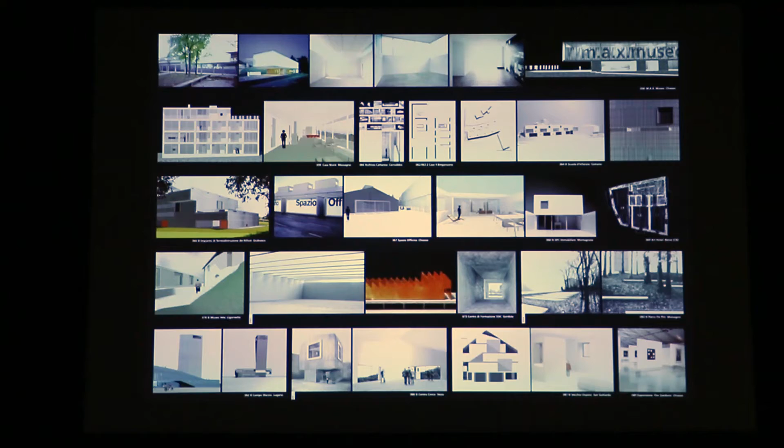For the last two decades, our studio has been involved in several project typologies, from the private house to public and institutional buildings to urban planning, becoming successfully engaged with all dimensions of architectural and urban design.

Facing a project, we recognize two kinds of thinking that interact between them, making images coming forth. The first is given by the effort to see everything as new, absorbing with our imagination all the impulses that derive from the place and the pre-existing context, without prejudice, as if we were facing a certain problem for the first time, with the typical enthusiasm of children.

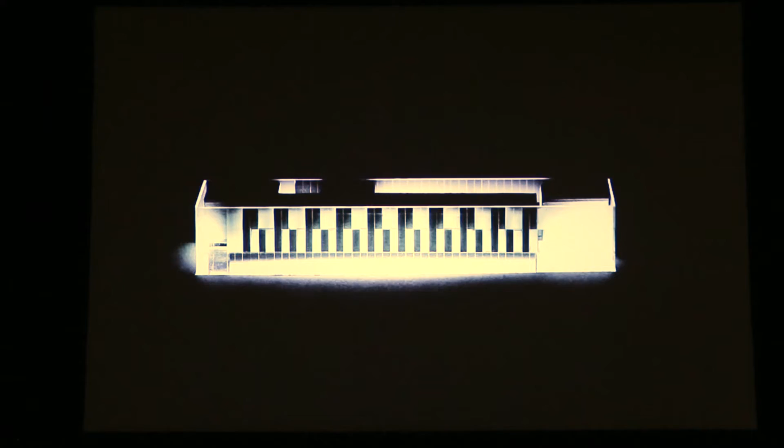The second approach is given by our practice, our professional competence, and the previously acquired experiences, and by the materials accumulated in our memory: experience, evolution, tradition, reference.

We always strive for sustainability in our projects. Between 1989 and 1993, we designed with Giancarlo Durisch the Swisscom Service Center in Giubiasco. At that time, the Swiss label for sustainability building, Minergie, didn't exist yet, but we realized the first high-energy efficiency building of southern Switzerland, with six main projects in the field of ecology and economy.

While renovating the Teatro Sociale of Bellinzona, we came across the big theme of historical heritage. We got convinced that the best way to preserve the past is to make those buildings reusable in the contemporary age. As a consequence, this sustainable approach to the past has to face the reality of the contemporary.

With the restoration of the Benedictine monastery of Claro from 1996 to 2007, we achieved an important and intense experience with the forms, the construction technologies, and the materials of our tradition. We learned from our Benedictine clients the importance of always establishing precise and common rules.

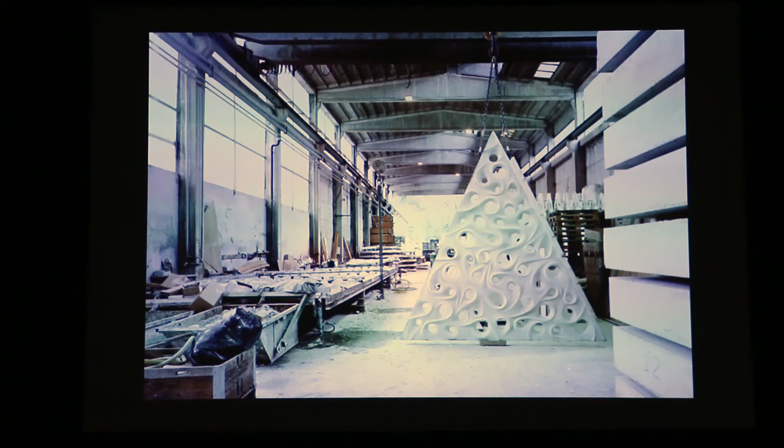Architecture is a system that is strictly related to the site. In this system, the different aspects of the project constitute a complex organism. At the origin of every project, we find the recognition of the uniqueness of the site and of the essential characteristics and properties that determine it.

With the topic of site, we can understand, depending upon the situation, a landscape, a city, an urban space, a building, a room, an object, a surface - the context of our intervention.

To build means intervening on an existing balance and modifying it in an irreversible way. The challenge is to recognize the essence of a place with the purpose to create a new balance, condensing an idea, concentrating it and reducing it to an essence, in a way to create a new reality that gives us the sensation to rest in itself, provided with its own naturalness, a natural evidence that is able to reconnect itself

to the collective memory. In German we could use the term Selbstverständlichkeit. Maybe we can say self-comprehensiveness.

In our more recent realizations, we were able to make a synthesis of the experiences we earned from former projects. The Vocational Training Center of the Swiss Master Builders Association in Gordola represents the ability to carry out a complicated task with a simple and essential system, a light building.

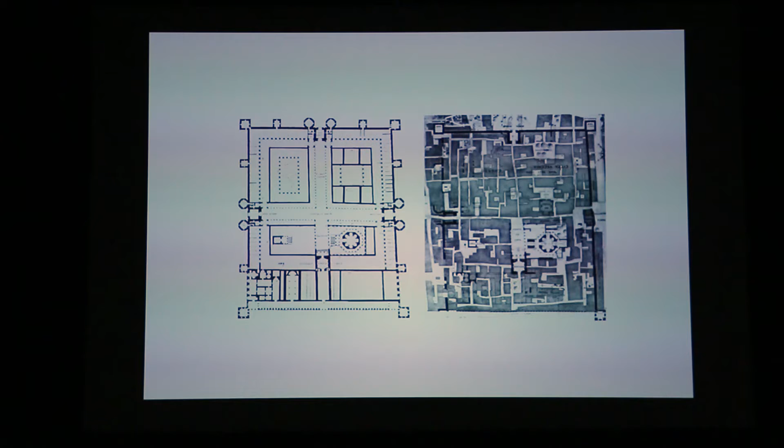The confrontation with the idea of reuse that was the main project theme last year with our students at the Mendrisio Architecture Academy made us consider that everything is reuse and to research on the paradigm of palimpsest. The city of Split is the re-inhabitation of the Roman Emperor Diocletian's palace, an imperial palace that fell into disuse after a time and then became the structure for the new city.

In his wonderful book Invisible Cities, Italo Calvino makes Marco Polo declare to Kublai Khan: 'Every time I describe a city, I'm saying something about Venice.' The Venice Lagoon, an ecosystem that embraces and includes the city, is for Venice what for other cities is the countryside. The reuse and the rebirth of the abandoned islands of the Venice Lagoon as an urban constellation integrated to its natural context would constitute a new perspective for the future of the city.

Our students were invited to work on small territorial fragments which are characteristic to the Venetian lagoon: islands, octagons, fortifications, lighthouses and shelters for fishermen, all charged with past histories and function.

Each student adopted an abandoned island, analyzing its history and pre-existences in order to describe, like Calvino in Invisible Cities, a new program and a coherent project for its reuse, developing a sensibility that celebrates the fleeting and dynamic relationship between physical structures and program.

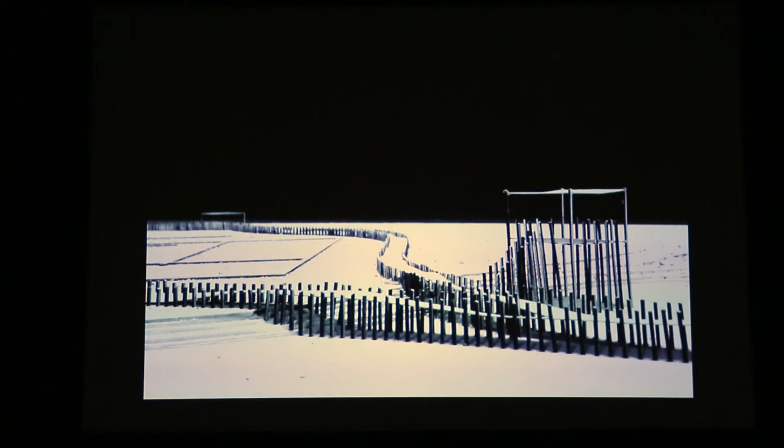A center for navigation control of the cruise ships at Sant'Angelo delle Polveri, a new public transportation station linked to a new entertainment hall at Madonna del Monte, an observatory of the wildlife of the Northern Lagoon and of the Roman archaeological excavation site at Motta di San Lorenzo, or a public thermal bath of the Renaissance at the Renaissance Fort of Sant'Andrea.

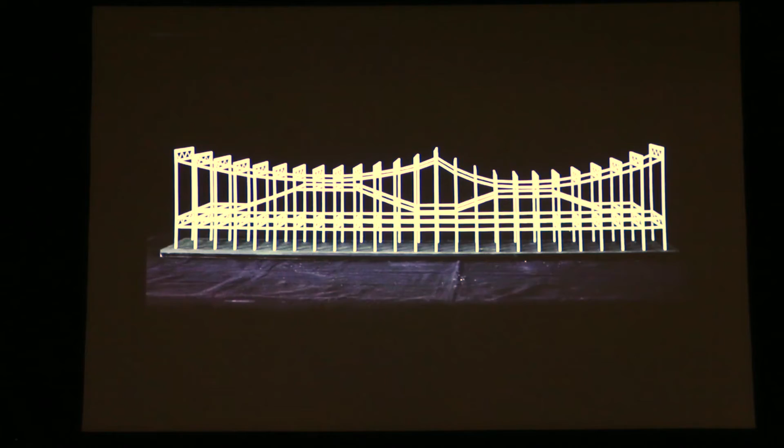A philharmonic hall over the island of San Giuliano, entering the bridge Ponte della Libertà which connects the mainland to Venice. The Venice Museum and Center for Archaeological Studies, already scheduled but never achieved, on Lazzaretto Vecchio Island.

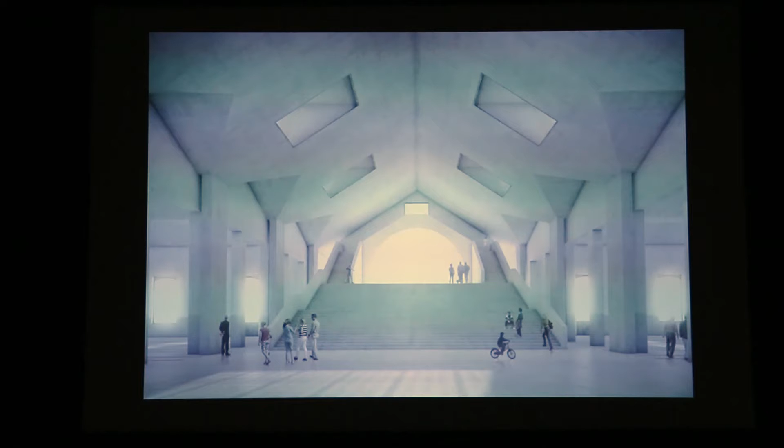Actually, these examples put in evidence that the city, but also our memory, is nothing else than a palimpsest, a document that is continuously overwritten. The contents that are no longer necessary are cancelled and substituted with new contents that correspond to the contemporary physical and social requests. The idea of reuse is not only a physical operation, it can also be a way of thinking that can inform the design of new buildings.

In our competition entry for the transformation of the Lausanne locomotive workshops, part of the heritage of Swiss Railways, into a new museum for modern art of the city, the former space of the factory building is maintained as a public empty space below the museum.

A big covered public space, a passage below the museum within the walls of the previous locomotive workshop, could have linked the esplanade of the new cultural center of the city of Lausanne with the train station and with the city. Also, the industrial architecture would have been visible mostly as a fragment composed by the old facade and the soil.

The spatial morphology, the hierarchy of the sheds and halls of the workshops would have been still embodied in the core of the modern cultural center. The concept of palimpsest, of superposition of overwriting of the pre-existing, is an important rule.

This is an important rule for developing and transformation of our cities, our environment, but also of our civilization, our culture, and even of ourselves. A military riding hall and horse stables can be overwritten as a city theater.

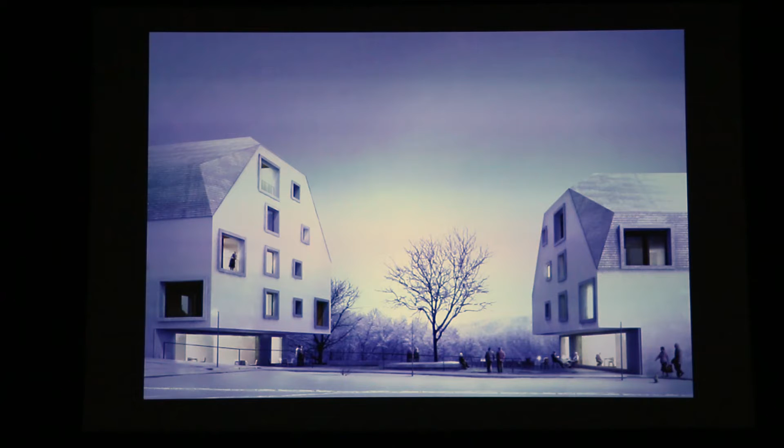Or in the suburbs of Fribourg, where our winning housing project for persons with reduced mobility becomes a place for socialization for the entire population of this heterogenic suburb, with a lack of places of social reference and identification. And at the same time, giving a better life quality to persons with a physical handicap, promoting an active interaction with the social context of a small suburban community.

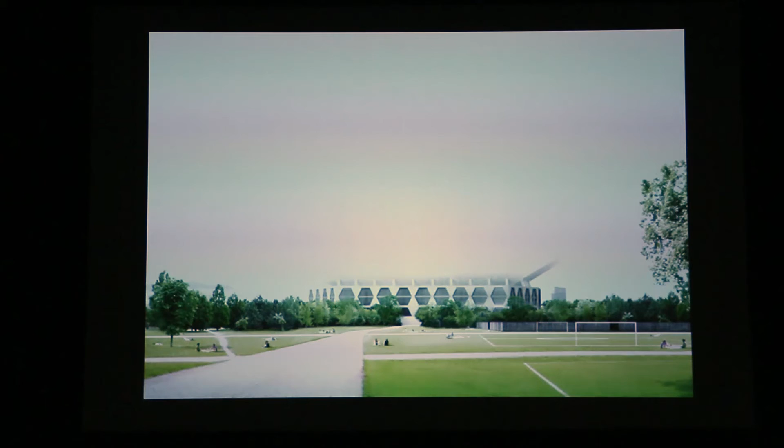We strongly believe in the social role of the architecture of the city. This is the case also for huge peripheral suburb areas of big cities like Zurich, this competition entry for the new Zurich Ice Arena.

Aldo Rossi defines the city as an architecture, a concept that is crucial to face in an effective way urban space and its transformation. For Aldo Rossi, making architecture is always about dealing with the architecture of the city. I quote Aldo Rossi: the city is to be understood as an architecture. By architecture I mean not only the visible image of the city and the sum of its different architectures, but architecture as a construction, the construction of the city over time.

I use the term architecture in a positive and pragmatic sense, as a creation inseparable from civilized life and the society in which it is manifested. By nature, it is collective.

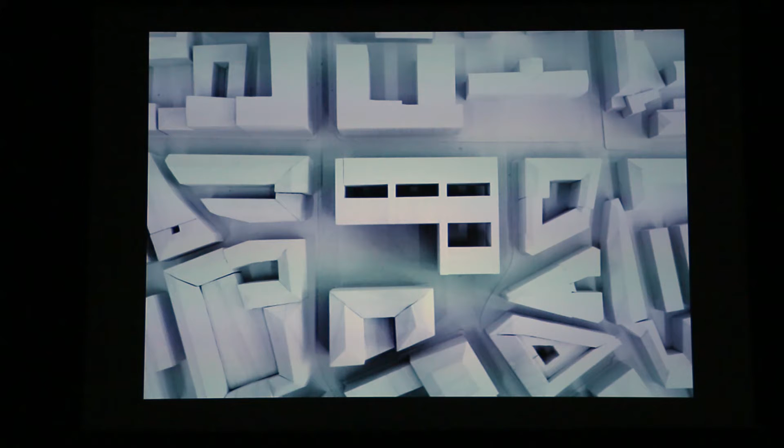And it is just this architecture of the city that became also a workshop theme for our second year bachelor students at the Swiss Federal Institute of Technology in Lausanne. We let the students work on the city of Lugano, it's our city, defining full and empty spaces, structure and space of the architecture of the city.

Creating flexible and sustainable modular structures for the urban scale, structures to be placed as constitutive modules of the architecture of the city, defining urban spaces. Creating new ideal images for 5 real critical city areas. This type of work gave birth to new architecture identities.

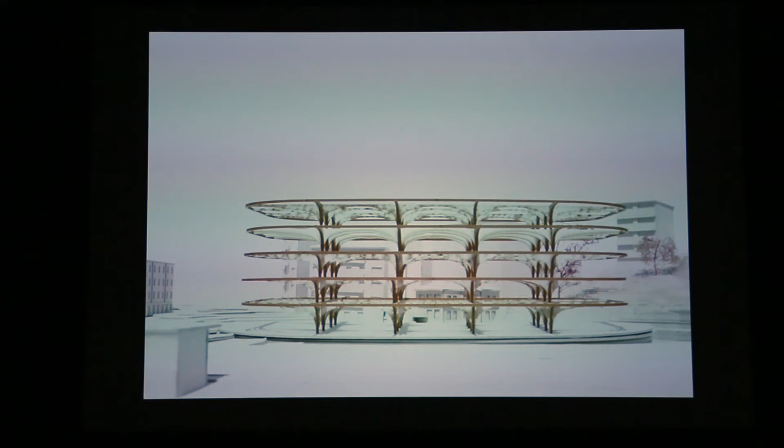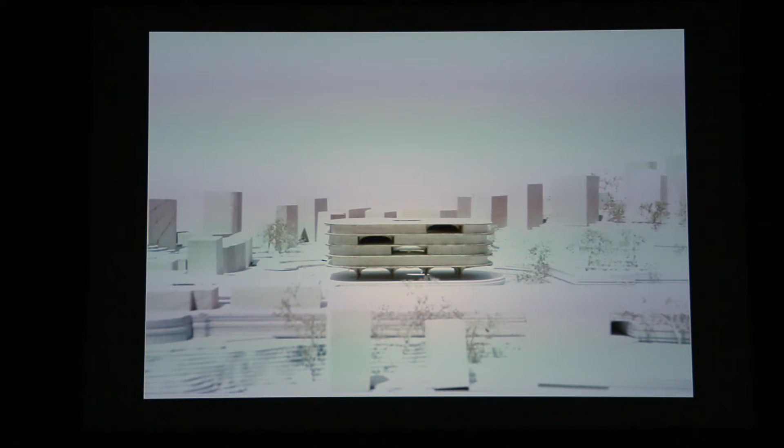Hybrid buildings able to contain any type of public facilities thanks to their structural, typological and urban quality. For example, instead of a 40 million bus platform to be realized in Lugano, with our students we propose, for the same costs, a multifunctional architecture with bus station, retail, university and co-working spaces, a hybrid building able to redesign the entire area, a landmark for the city.

The first project we want to show you is our first housing project. The House for a Sculptor was a very particular project of architectural preservation built between 1998 and 2000. The house is located in the historic center, the medieval core of Mendrisio. The building was conceived as a sort of connection building between the old courthouse and an ancient monastery.

Due to several alterations and modifications during centuries, the typology of the building before our intervention was very unusual, difficult to be defined. The original historic structure was destroyed over the centuries as a consequence of the inheritance laws in Ticino, while the house was divided into different parts.

The house, as we found it, was characterized by an overlay of two different structural systems. The outer stone walls formed a solid and precise case, characterized by the overlap of different openings of different ages, while the internal original structure was destroyed in the 19th century.

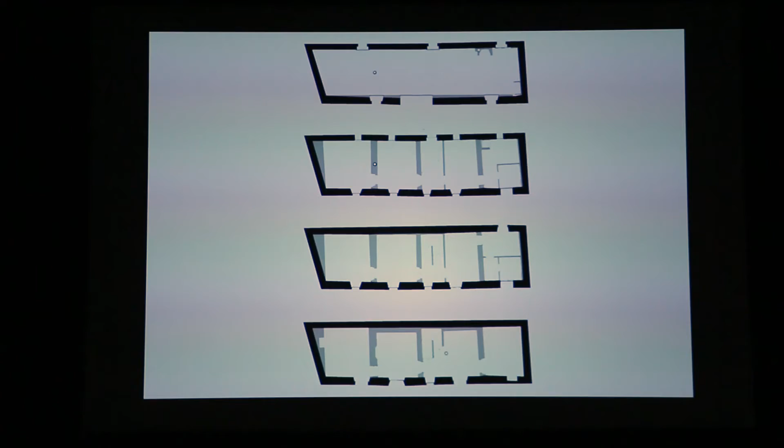The new internal structure was organized on 4 levels instead of the 3 original levels and was not relevant in terms of architecture and heritage. Most of the original medieval openings were shut, while the spaces were small and extremely dark. The demolition of the whole more recent internal structure appeared as the only possible and logical way to proceed.

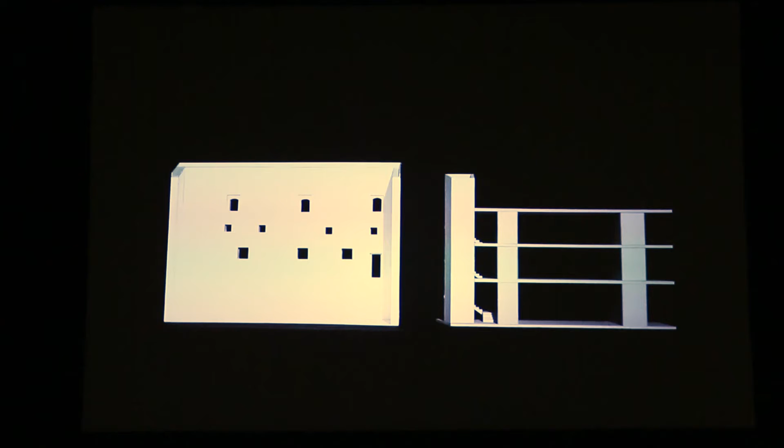This operation allowed the original medieval structure to be reborn as a new element, and all windows were reopened. The demolition process allowed us to place a new precise concrete structure into the old medieval case, a simple, precise and forceful structure that at the same time defines all spaces of the new house.

It is the classical theme of the house inside the house. We created a new balance, a jeu savant, a wise dialogue between old and new, a sequence of light material, spaces, sounds.

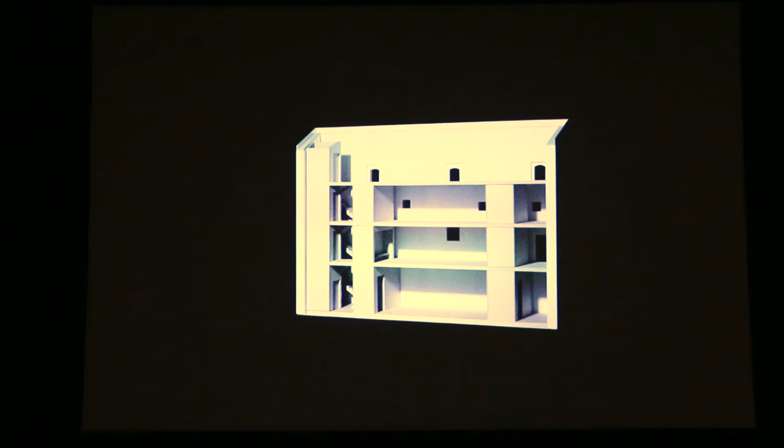The new structure, cast in apparent concrete, stiffens also the old medieval walls that become the shell of the new core. The ground floor, on the courtyard level, thanks to the demolition of the recent walls, the ancient entrance was restored, becoming the new access to the exhibition space of the artist.

All space-defining elements, such as slabs, walls, ceilings, are also structural elements. There is no difference between space-defining elements and structure. They form a monolithic conglomerate cast in concrete.

While the ground floor is the level of the courtyard, the first level of the house is the level of the garden. There is a substantial equivalence between structure and space.

The form of the structural elements is at each time adapted to local needs and functions. They become kitchen, laundry, fireplace, bathrooms, wardrobes.

At the second level, the structure is completed by the only light non-structural element which defines, like coffers, the two bedrooms closed by sliding doors. This is the only exception to a structural system in which structure and space are otherwise completely equivalent.

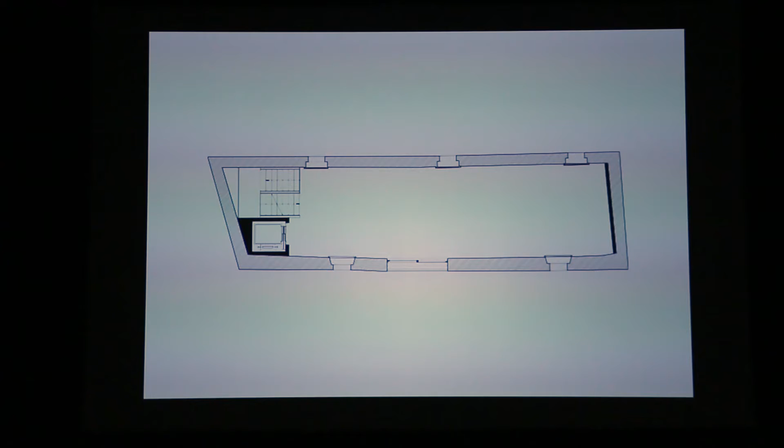The third level is conceived as a big and high open space reaching until the roof, a multifunctional space that hosts library, private studio and playroom.

The section underlines the relationship between the historic medieval shell, with its uneven original windows, and the new precise concrete structure. The new house is a unitary entity made of two complementary parts, shell and core.

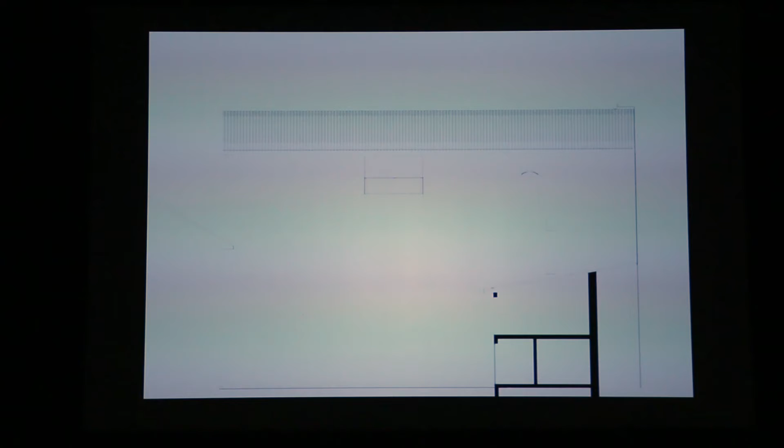The courtyard facade after the renovation, with the reopening of the original windows and of the main entrance. The garden facade after demolition of precarious outbuildings and with the original medieval windows restored.

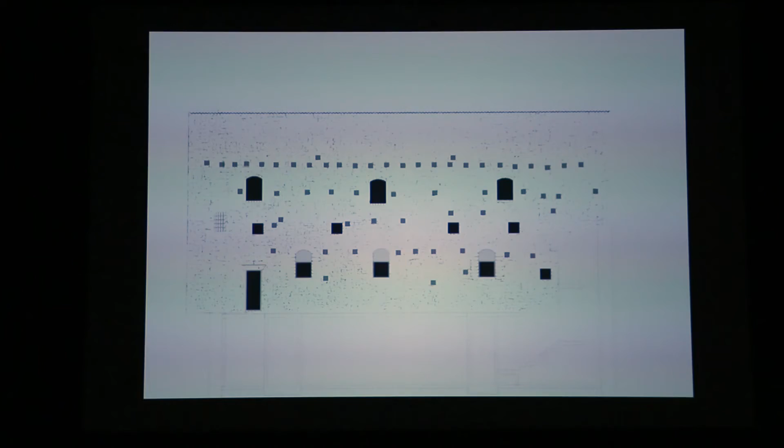The typical material of the ancient medieval facade gives to the garden a particular atmosphere, an archaic expression. This archaic appearance is emphasized at nighttime by the contrast between the medieval facade and the warm contemporary internal spaces.

In the courtyard, the old entrance is restored to give access to the sculpture exhibition space of the artist.

The artist's bedroom, a small room with a simple natural light regulation system. The whole house is characterized by a very simple but effective standard.

The living and dining area on the first floor with direct access to the garden. The apparent concrete structure is clearly visible, in contrast with the plastered medieval shell.

The new window frames on the studio level are attached directly to the existing walls with a very simple detail. The relationship between old and new is straight and pragmatic. The openings, indeed, start from the floor level, giving a nice and charming view of the garden below.

Materials are taken from the local tradition and are simple and cheap. Concrete for the new structure, steel frames for the glass doors, small white terrazzo tiles on the floor.

The concrete floor of the ground level is the only exception, while structural cores are completed with maple wood infills.

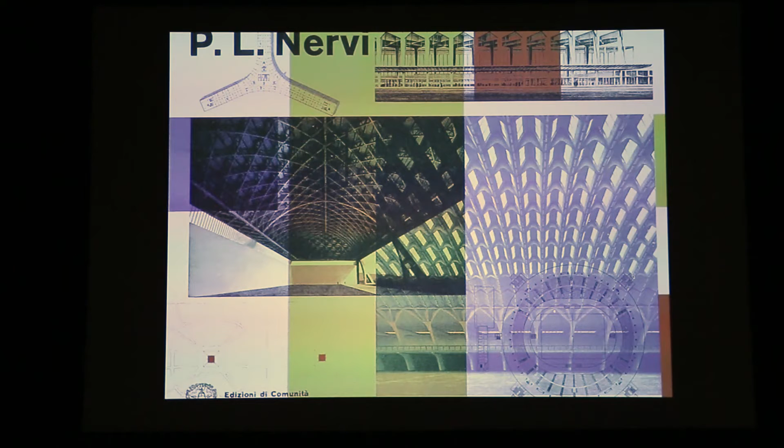Max Huber was the creator of the corporate design of many famous Italian labels, like Borsalino in 1949, or the curator of advertising graphic design for Olivetti in the 50s, a cultural heritage of importance. Max Huber was also engaged in creating the graphic design of different publications on architecture.

After Max Huber's death, the widow, Japanese artist Aoi Huber Kono, decided to dedicate an archive and an exhibition space to the memory of her husband. We didn't know each other, but she was impressed by a competition entry of our studio because it handled the themes of transparency and colors.

She contacted us with her staff and asked to help in the realization of a small exhibition space. The economic availability was not enough to buy a ground and build a museum on it. The city authority of Chiasso had restored, with its cultural-oriented local politics, the local theater, providing a high-end cultural program of modern dance, jazz, and theater.

Close to the city center, an abandoned industrial area was located between the refurbished city theater and the school district. Abandoned for years, the site was polluted and constituted a serious ecological risk in the immediate surroundings of kindergarten and primary school and their playgrounds.

The roofing of the garage, located just beside the entrance of the primary school, was covered by 900 square meters of Eternit panels in an advanced state of deterioration, containing asbestos. Many plates were broken with the asbestos fibers showing off.

The decision seemed clear to us. The new museum had to be built in front of the theater on the place of the car workshop. At the same time, we noticed that the garage had the potential to be transformed with a very low-cost intervention into a multi-purpose hall, considering that the Eternit roofing had, however, to be substituted and disposed of.

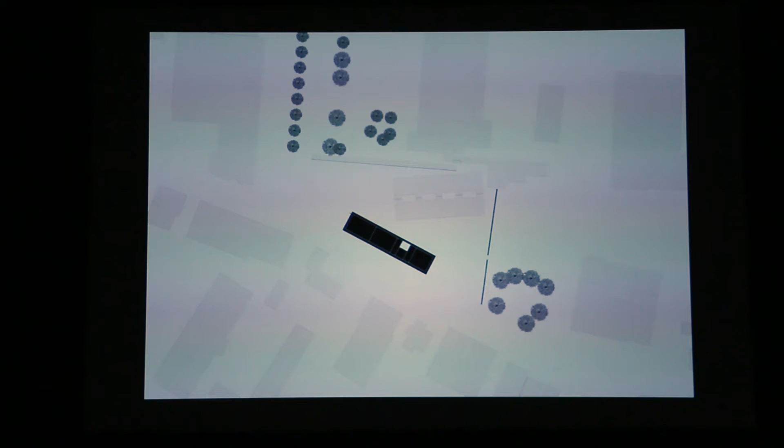Our merit was to recognize the potential of the pre-existing structures. Despite the limited economic availability, and with a few elements, it could be possible to create a new public district dedicated to culture. The model study of 2002 shows the proposal.

Our small project at the end of Switzerland got some interest also on a national level, so that the then president of the Swiss Confederation, Moritz Leuenberger, expressed the desire to see the project, considering it exemplary as a recovery solution for abandoned industrial zones in sensitive city areas or suburbs.

The garage was transformed into Spazio Officina, which means workshop space, a multi-purpose hall of 800 square meters without its own infrastructures and with an industrial finishing standard. The open facade towards the demolished car workshop was closed by containers which provide the services, the kitchen bar, and technical room. With simple but effective means, good acoustics are provided to the hall for live music events.

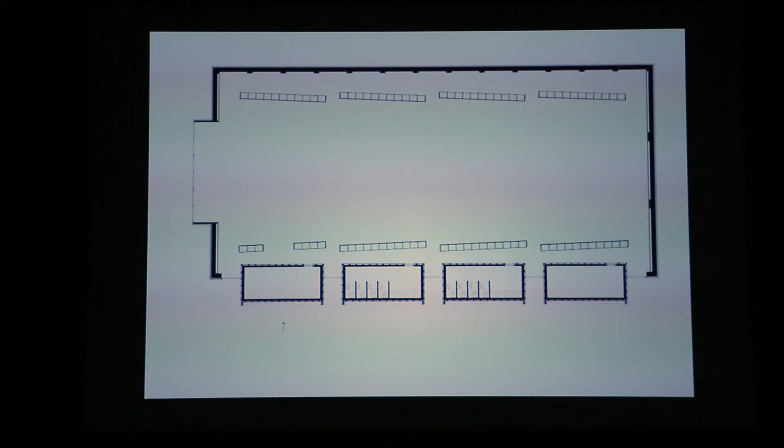The acoustic elements define at the same time the storage rooms for chairs and display materials for exhibitions. In a similar way to the facade, 4 skylights provide the hall with daylight. The longitudinal section and facade show the new shell of the building. The existing walls are coated with thermal insulation covered by a dark corrugated zinc sheet.

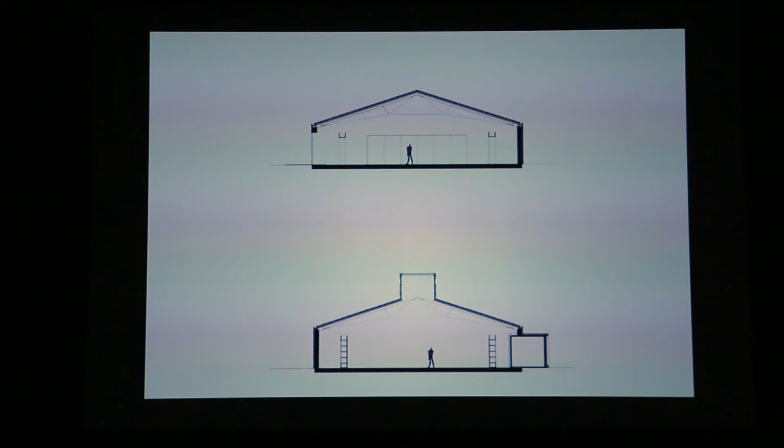The cross-section shows the conceptual and constructive simplicity of the intervention. The new facade coating enhanced the clearness of the pre-existing building. Another container on the main facade creates the entrance.

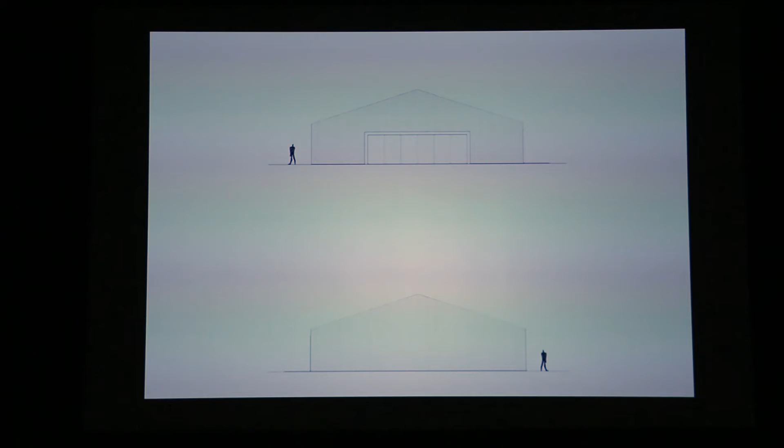The Max Museo is made of a simple volume placed on a base which resolves the level difference between the street and the new public squares in front of and beside Spazio Officina. Max Museo is a simple structure characterized by a substantial equivalence between structure and space.

Visitors access the museum from the street level through a big entry porch and the entrance hall with bookshop and small cafeteria. From here they access the small museum foyer.

From here, visitors can access the main level of the museum with a sequence of 3 exhibition spaces, or from the foyer descend to the lower level that hosts the 2-story multipurpose space, the services, wardrobes, and the Max Huber archive.

The 2 cores at the entry level support the longitudinal walls of the exhibition spaces on the upper floor. Thanks to pre-stressing, wide cantilevers are made possible without structural elements on the 2 ends of the building: the entrance porch at one end and the 2-story space at the other end. The 3rd core doesn't support any structural parts; it stabilizes the structure and contains the elevator and the building technique.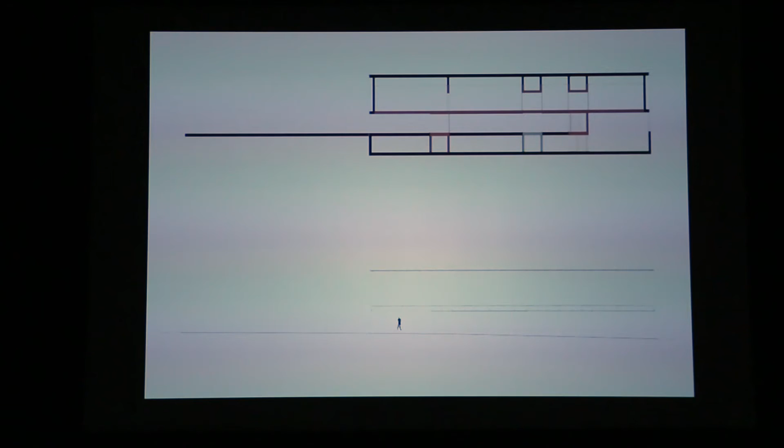The symmetrical structure is simple, forceful, and clear.

Over this finished but raw structure, realized with very inexpensive constructive solutions, the openings are closed with etched glazing to diffuse the light. The exterior shell, made of profiled industrial U-glass elements which filter and diffuse the light towards the interior, fits perfectly like a glove on the structure.

I hope you can see something. Hopla. And now we got all problems together. Because normally it shows perfectly, the concept of the facade, but no. Okay.

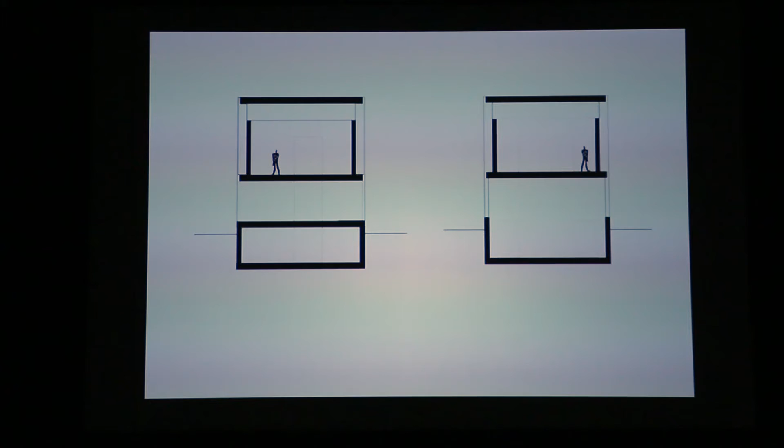The cross sections show the clear and simple structural concept and the double facade system which filters and diffuses the daylight, providing a good natural luminance of the exhibition spaces.

The construction detail of the facade clearly shows the concept of the upper floor facade, where between the exterior shell made of industrial glass and the interior wall of the exhibition rooms, which is only glassed in the very upper part, an interstitial space is generated that diffuses the daylight in an optimal way and can be highlighted at night time to make the museum visible as an important landmark in the cityscape.

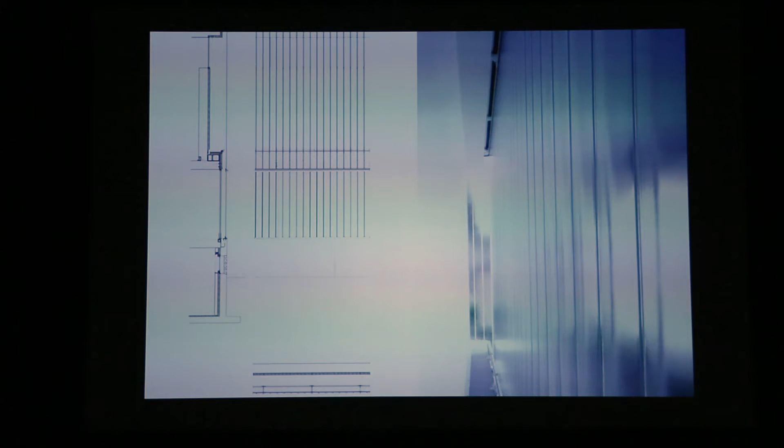The 9 by 9 meter cantilever generates the low and wide entrance porch, the expression of the wide, full glass volume in the cityscape with the great transparent opening of the cafeteria, that is at one time a showcase of the museum towards the city, and at the other an observatory of the urban context for the visitor.

The reflecting shell of the Max Museo, with its particular, let's say, ice cube effect, and the matte zinc skin of Spazio Officina are complementary in their expressions, adapting themselves to the atmosphere of the context.

Thanks to the lowering of the squares to the level of the gardens, a safe place is generated in which all kinds of recreational, cultural and scholastic activities are made possible. The new access porch of the school is a discreet and filigree filter between school, gardens and cultural center.

At night, the museum transforms itself into an elegant luminous body, performing as an important landmark in the cityscape.

The small entrance hall to the staircase and the exhibition rooms. The staircase with the shifted stairs that provide daylight in the lower floors. The multi-purpose space on the lower level.

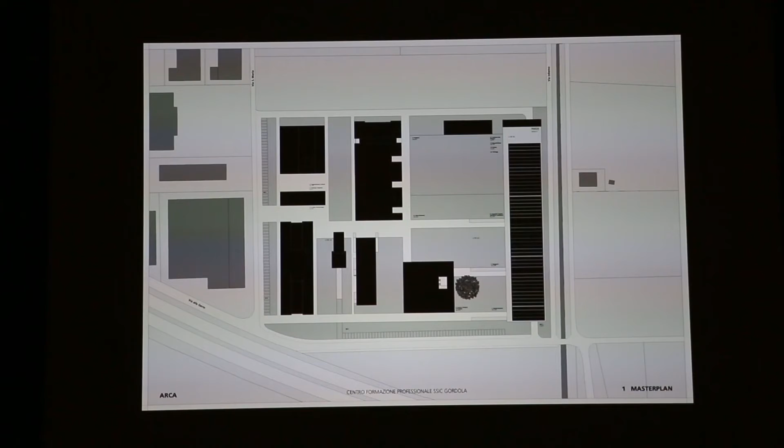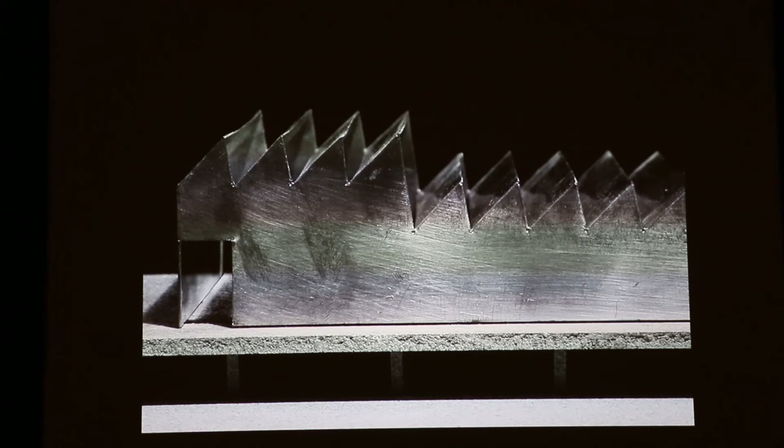With a certain surprise, the master builders discovered that their new project was not built in brick, like usual for them, but was conceived as a light structure made of steel. The new building had to bring the laboratories above the flood level, avoiding an interruption of the continuity of the valley.

The plan of the ground floor shows the regular structure of the concrete platform. We decided to raise the level of the platform 80 centimeters higher than the flood level. In that way, the space under the platform can be used as a car parking.

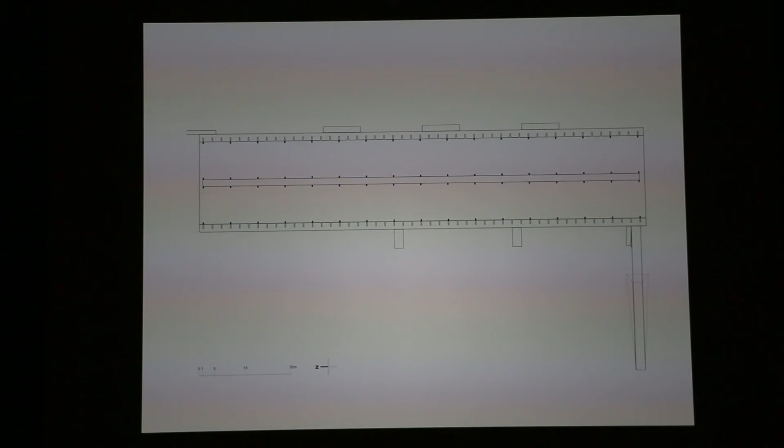The structural grid of the platform is 9 by 12 meters and is based on a multiple of 3 meters. Due to the very low quality of the sandy ground, the structure is founded on very large linear foundations, similar to ski, to avoid an expensive foundation on piles.

The whole building is conceived without exception on a module of 3 meters, which corresponds to the ideal module for a workstation bench. The laboratories are conceived as a light steel structure with steel columns every 3 meters, covered by a framework of trusses with a free span of 27 meters, the whole width of the building.

Each of the 3 sections has a one-story concrete basement to host the dressing rooms and the infrastructures.

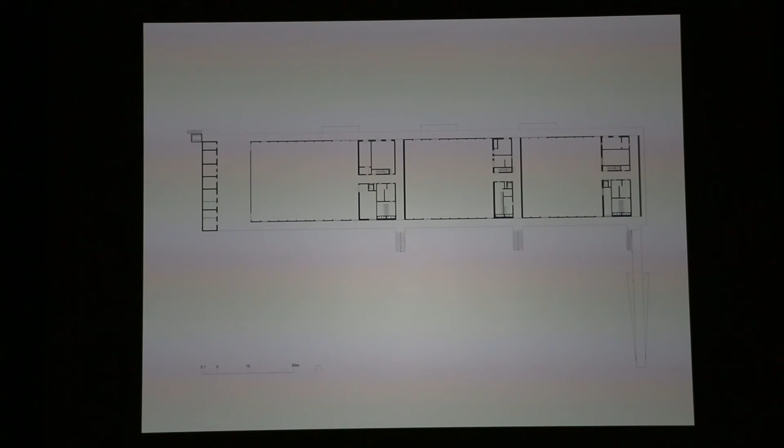The laboratories are conceived as industrial production sheds, which can be divided and equipped following the needs of the users. Each workstation has its own modular skylight, which provides natural, diffuse north light, provided by a sawtooth roof of the shed. A pleasant, diffuse, unitary, regular and shadow-free light permeates the working spaces in an ideal way.

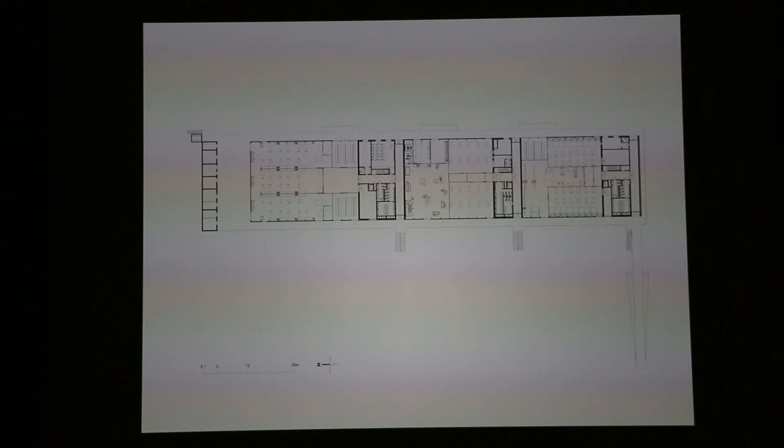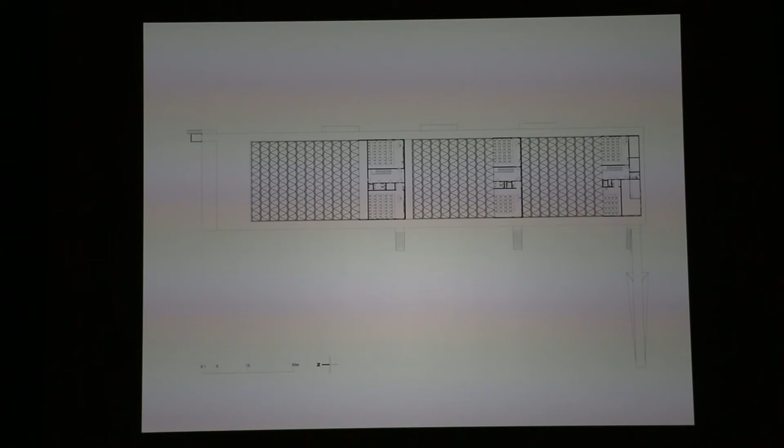Also, the spaces on the upper level above the dressing rooms are covered by the same framework of steel trusses, to provide spaces which are completely free of structural elements and can easily be adapted to the needs of the users, to host the theory and drawing classrooms, providing the same shadow-free and natural northern light.

The roof plan shows the regular design of the modular sawtooth roofing system, with the only exception of the 2-story parts of the building, characterized by a double module.

The section shows how the sawtooth roofing system allows to manage, within the logic of the structural system, every situation, like the 2-story parts of the building.

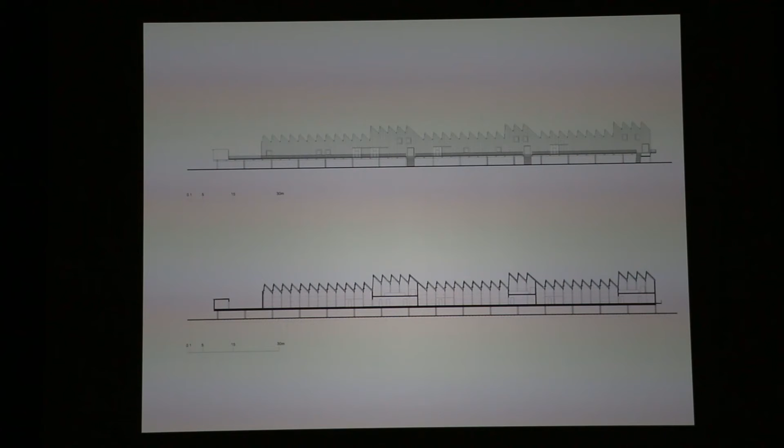The facade facing the campus shows the 3 independent access stairs and the characteristic pointy sawtooth shape, which is so typical for this big industrial shed.

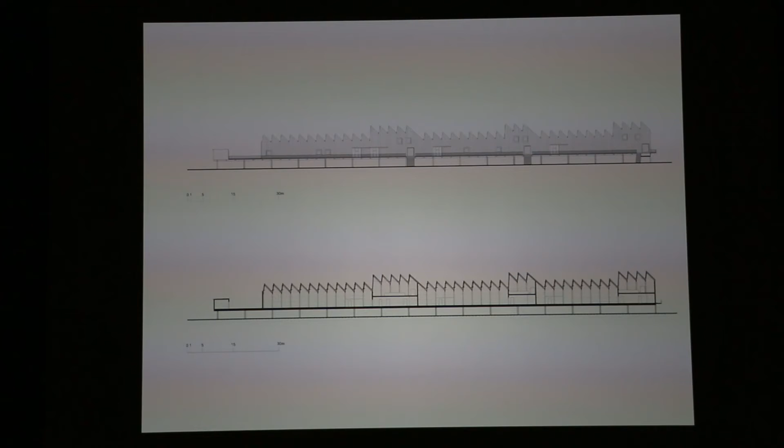The section shows the absolute regularity of the structure along the module, which, like a continuous band saw, jumps over the concrete basements.

The cross-sections show the absolute simplicity of the construction concept.

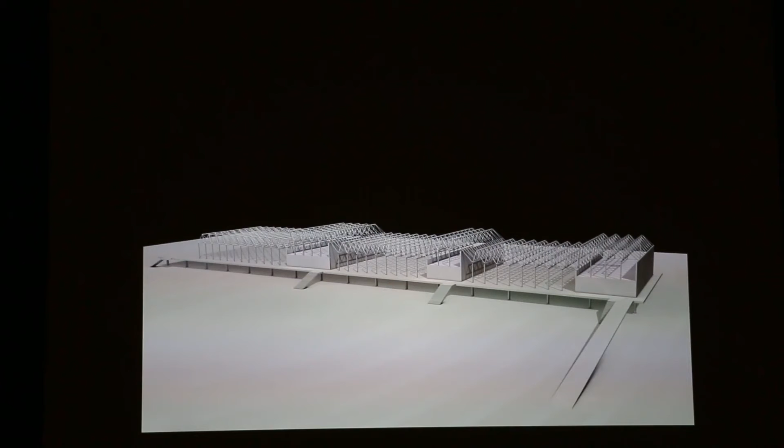The structural system is simple and precise. It solves in a one fell swoop all the needs of the client about flood protection, function, flexibility, structure, lightness, natural lighting, ergonomics of the workplace. It is a simple but effective organism.

The structure of the roofing, a light framework of trusses, is a sort of tracery that covers the whole professional training center.

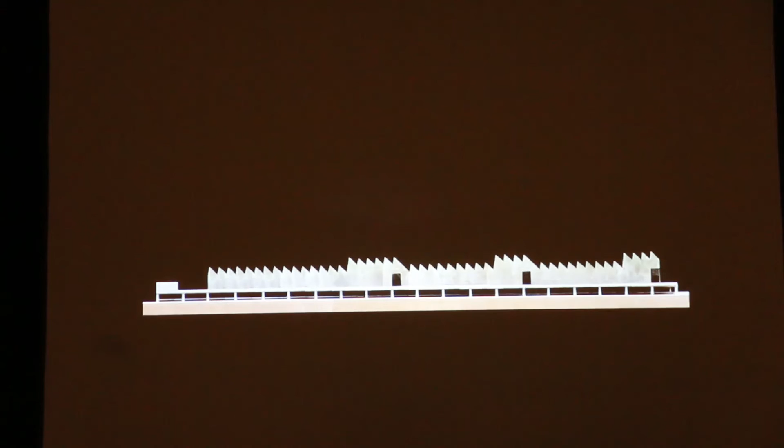The image of the new laboratory building on the concrete platform reminds that of a craftsman workpiece crafted in a precise and precious way on his workbench to protect it from the flood.

The model for the competition entry shows an architecture which is reduced to its essence. The challenge was for us to maintain the characteristic of this architectural organism in his essence and precision, also with his realization.

The glossy material of the facades lets the building appear as a precise and pointy object with a shape similar to a sawtooth workpiece milled on the bench. I hope you can see it.

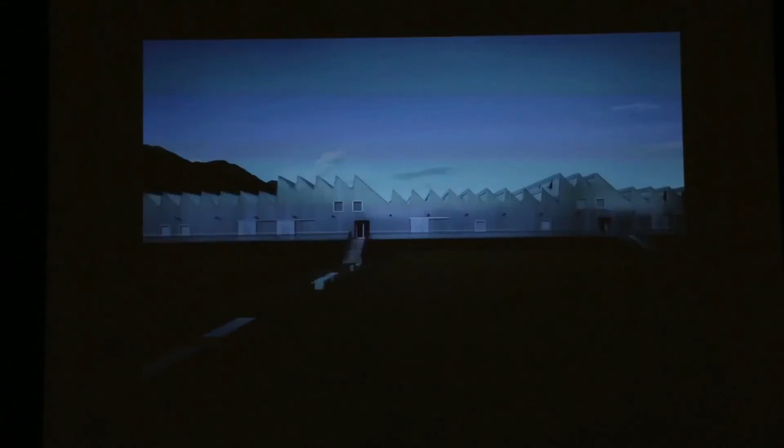We lost an image. Strange things happen. Okay, but...

This building is a low-cost building, with construction costs that are significantly lower compared to all other buildings for professional schools in the Ticino region.

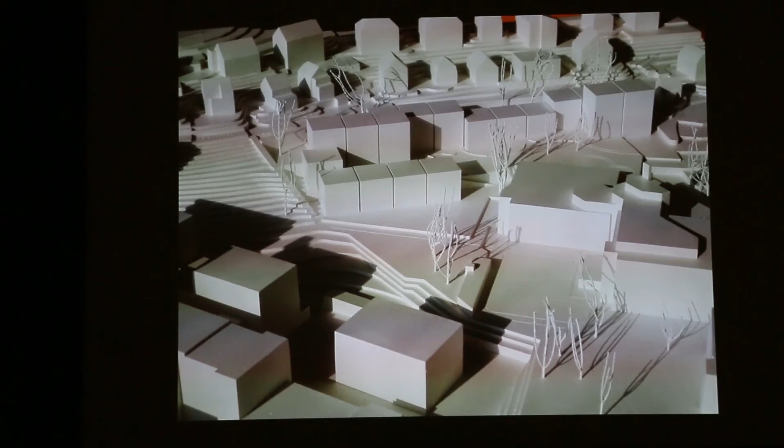The goal of a private foundation was to develop social housing for students, with 20% lower location rates compared to the average market price, through a joint venture between the City of Lucerne, which owned the property of the building site, and the private foundation. A project to host 280 students within the park of the major retirement house of the city of Lucerne. The main issue was to place a 280-student block into a quiet residential context without being too invasive.

We designed a modular building based on the size of a single room, referring to the typical one of the existing surrounding houses. In contrast with the precision of the completely modular regularity of the structure, we designed the external pathways as curved and smooth tracks in the form of meanders, in order to create new spaces for social interaction and activities.

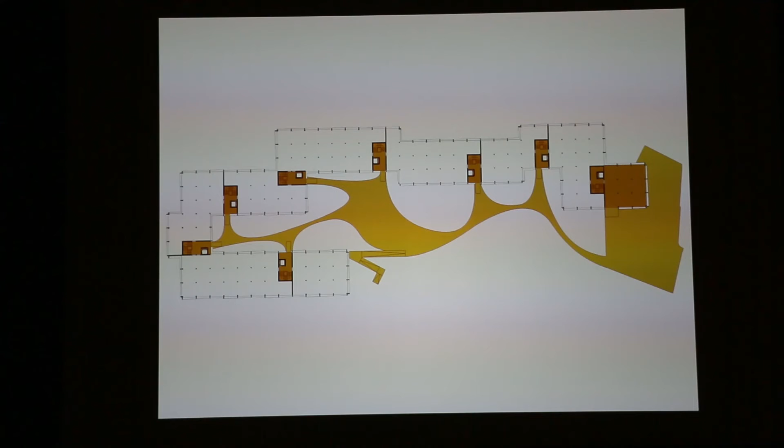The building is strictly modular, following a regular square grid without exceptions. Even the staircases and the elevator entrance modules respect the base module given by a student room. They are not exceptions to the structure, they confirm it.

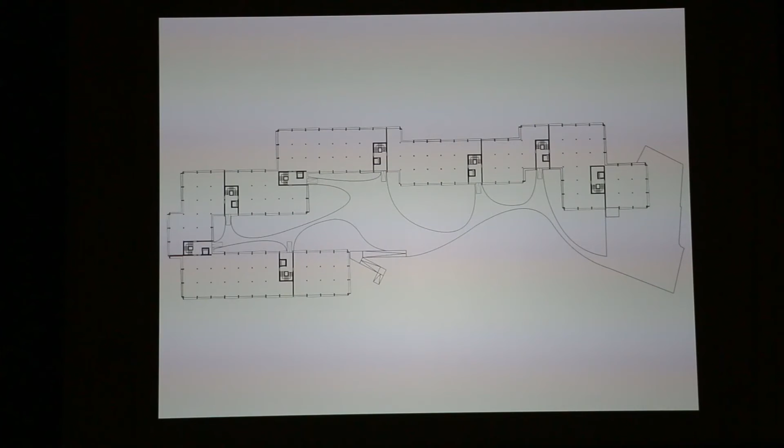In the realized project, the modular structural grid with columns is replaced by concrete walls. The modular structure allows the creation of different apartment sizes and typologies. Those are organized like a game, a domino, where the cores are the only fixed parts.

We came out with a series of very dense and flexible plans. The result is a huge diversity of the apartments, a big flexibility in adapting the typologies of the different apartment sizes, following exactly the mix requested by the client, and a high density.

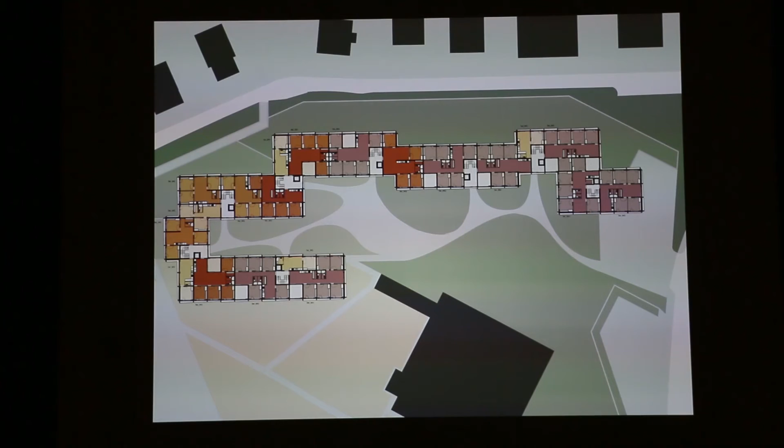Also, the corners of the building are solved without exceptions, following the logic and rules of the structural system. The volume is articulated on different levels to better suit the project site. Thanks to repetition of single elements, the construction was cheap, in line with the parameters of social housing.

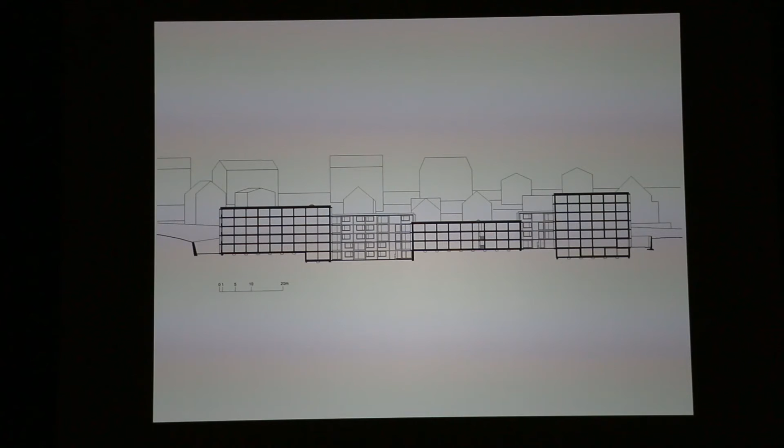The rendering for the general contractor's offer shows the common space of a 4-room apartment, looking from the kitchen dining area to the living area.

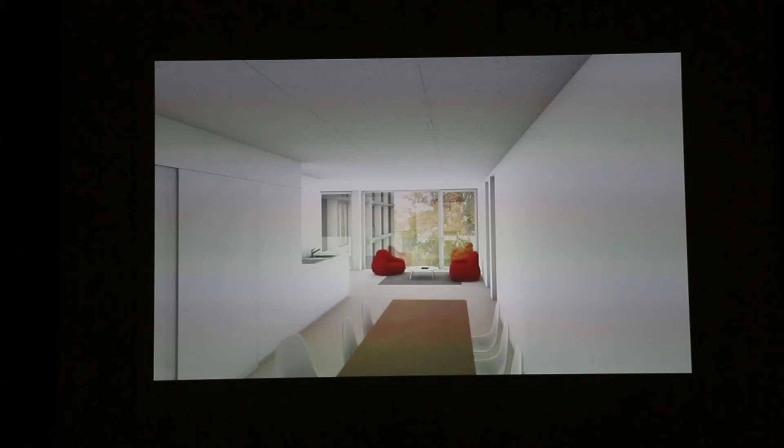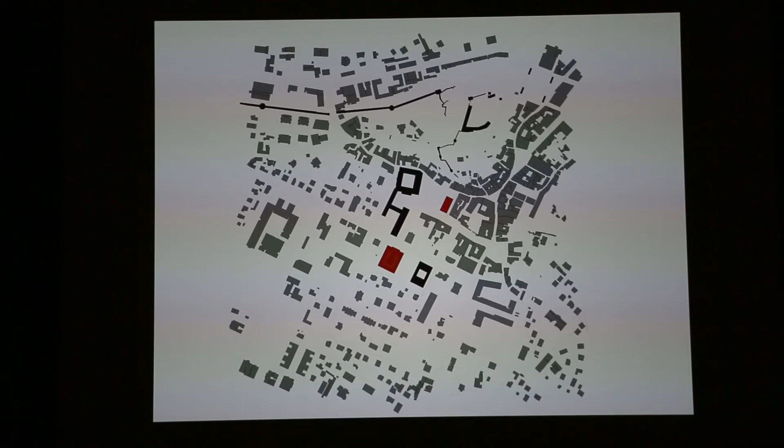The new Criminal Federal Court is built on the site of the old School of Commerce as part of a project that includes the regional tribunal and the public space between the two buildings. At the moment, the Criminal Federal Court is built. The other projects should be realized soon.

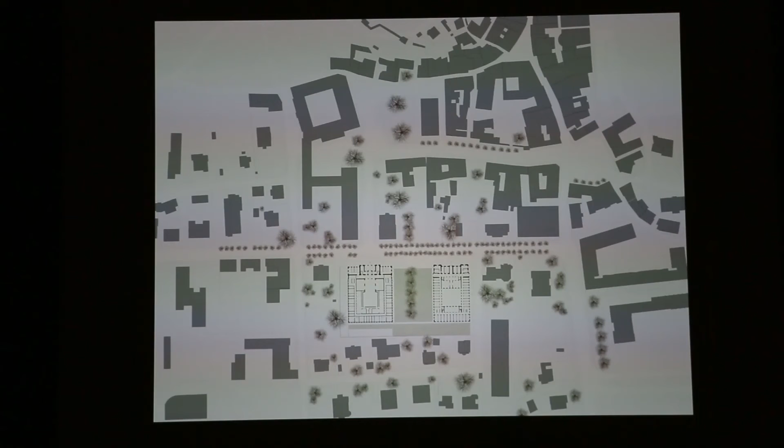The concept of the project is very simple. The main volume of the existing building was preserved and restored following the requirements of heritage preservation policies. The side wings and the rear volume of the two-story edifice were replaced by a three-story building to suit the new functions and user demands within the old building volume.

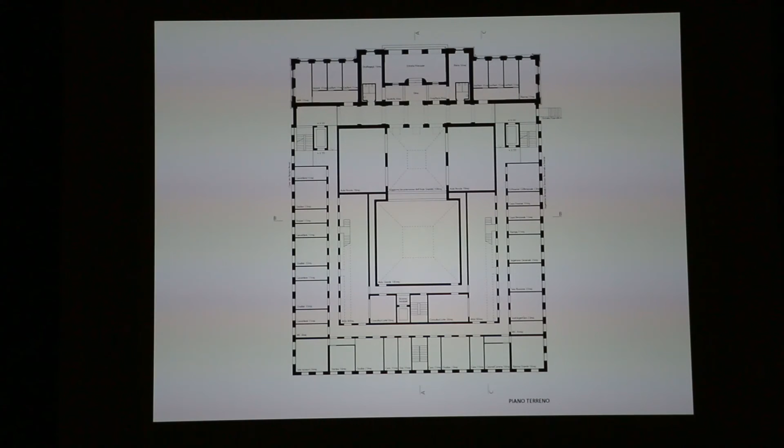The ambitious concept was to create a unique building where the old part merges into the new one, giving birth to a new entity. The new plan reminds us of the original typology of a courtyard building, where office spaces are placed along the facade, and the main courtrooms are in the middle.

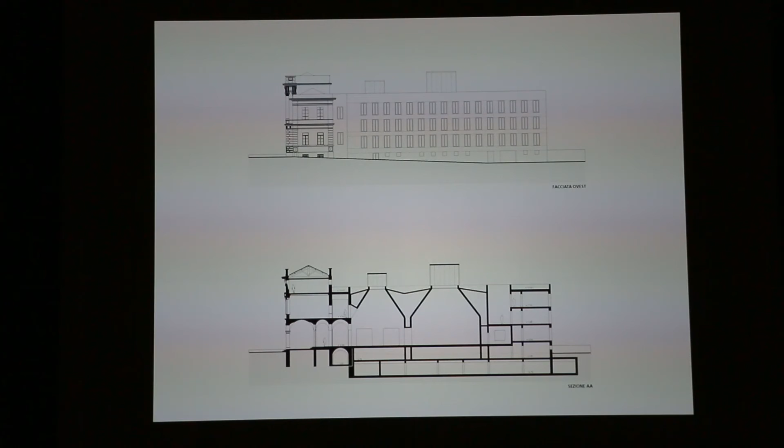The longitudinal section is characterized by a series of vaulted spaces that increase in dimension to reach the main central room, the tribunal court. The overhead opening gives diffuse light to central spaces, emphasizing the institutional value of the room. I hope you can see it.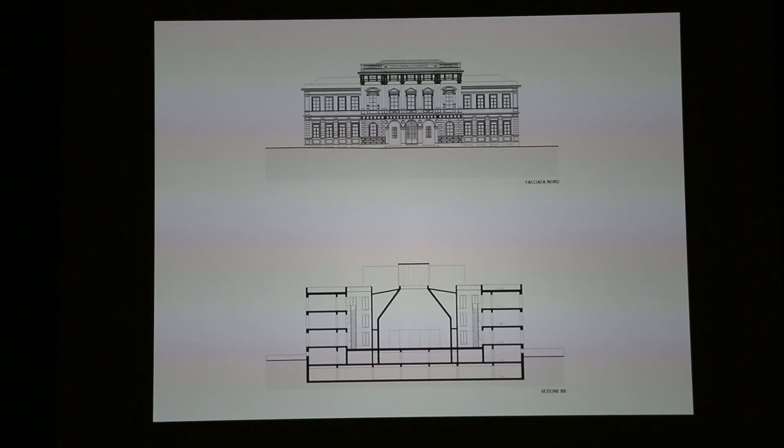The working spaces, the offices of the judges and the employees, are disposed around the central courtroom and are separated by two lateral covered courtyards that provide natural light to the office corridors. Structurally speaking, the cross-section has a symbolic value where the court, as an independent and impartial institution, is separated from the rest of the building.

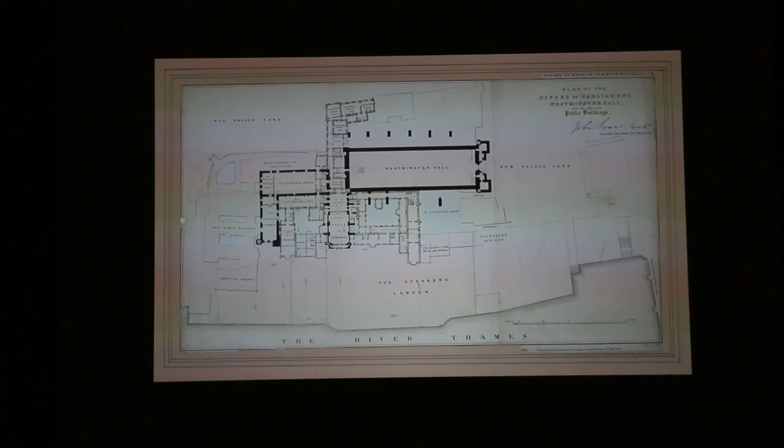The concept of our project, preserving the front part of the building and replacing the wings, reminds of John Soane's attitude to the project of the English Parliament in Westminster. The existing part is completed by new elements into a new entity, or better, it is recomposed into a new entity.

The longitudinal section, here you see the competition one, shows the sequence of different vaulted spaces, a crescendo from the entrance porch to the main court hall.

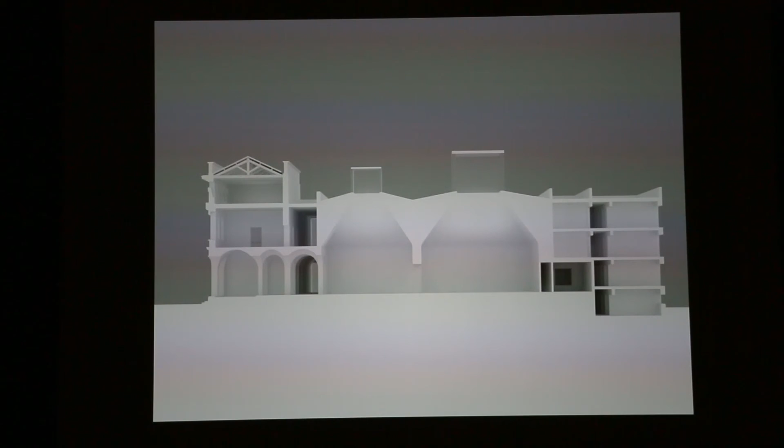The plan of the final project showed the intention of creating a new unique entity. The new building is attached to the existing one to maintain the original typology.

As you see, it didn't change from the competition. We always say if a project is good in the competition, the realized object will be the same.

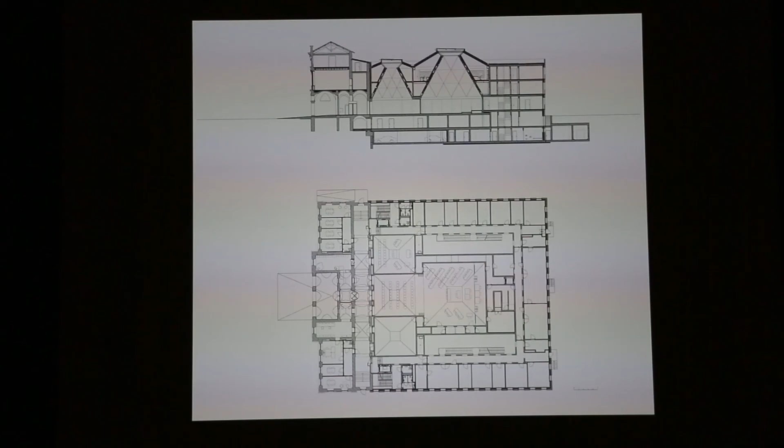The ground floor of the executive project.

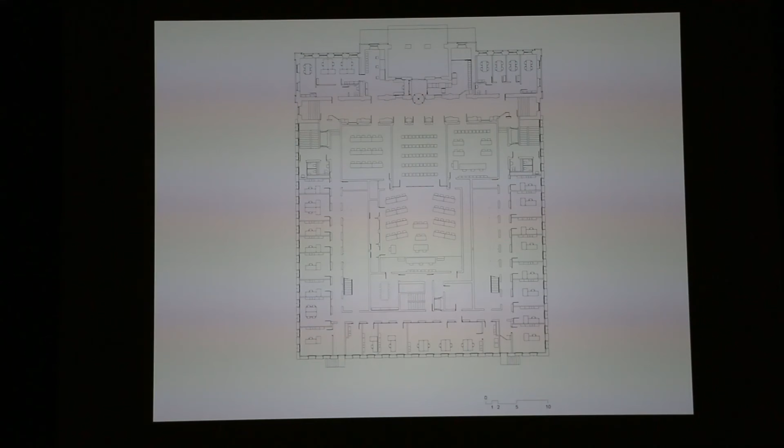The floor of the spaces for public access: entrance porch, entrance visitor hall, main court, minor court, and press room. These public spaces are surrounded by the offices of the judges and of the staff of the federal court.

First floor. The auditorium and the classrooms of the old trade school were maintained integrally in their substance and take the cafeteria and the chambers of the courts on.

The landscaped atriums beside the courts provide natural light to the corridors of the offices. The corridors open like arcades to the atriums.

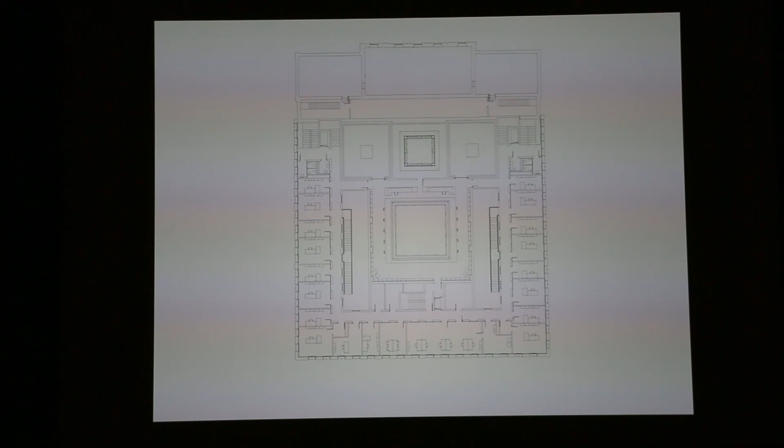Second floor, around the dome of the great court room, the library of the court is created. We like the idea that legal knowledge is placed around the courtroom to provide the judges with wise and correct judgments.

Longitudinal section, cross-section showing the main court, lateral atrium and office spaces on facade. This is the final project.

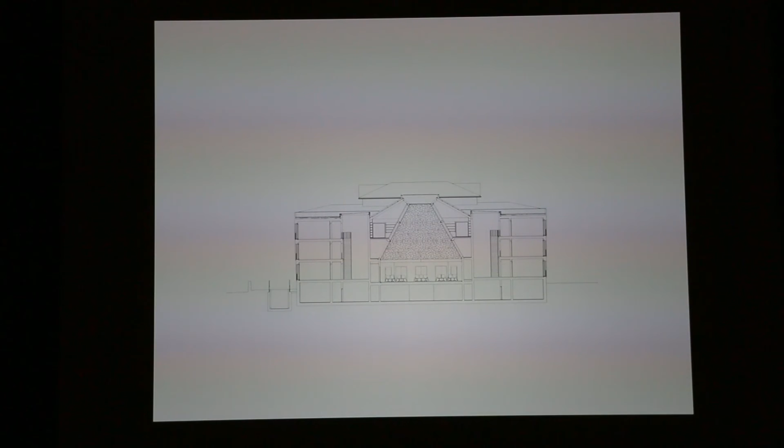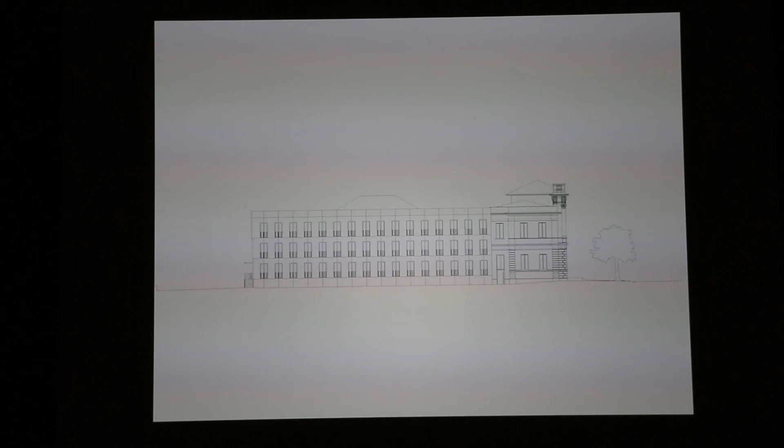The concept of the pyramidal domes was extended to minor lateral spaces placed beside the main court. The result is a series of homologous spaces different in shape and dimension.

The structure of the domes is a composite structure composed of two elements: a concrete cage realized on site, linked to a series of precast white concrete elements.

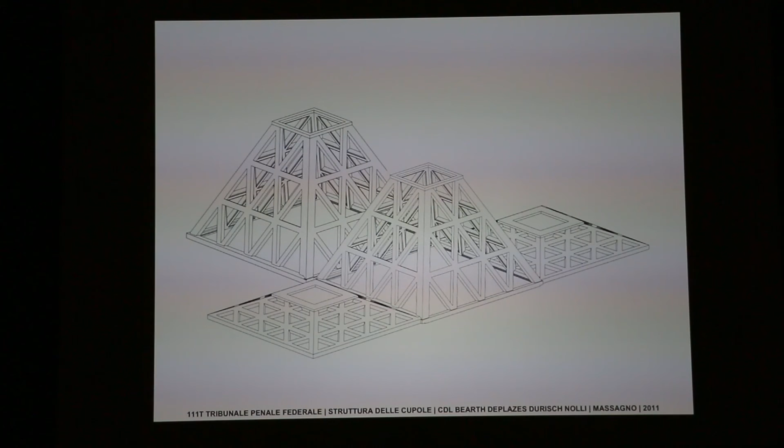The Federal Penal Court of Switzerland is conceived as a massive apparent concrete building. The exterior shell and the interior structural elements are all in concrete, in apparent concrete. The idea was to avoid any form of coating, especially for the domes of the court halls.

To reach a perfect acoustic of the court halls, a perforation of the domes and disposing acoustic resonators behind those holes was indispensable. It was clear to us that for architectural and aesthetic reasons we needed to provide a relief or a structure of the surface of the domes.

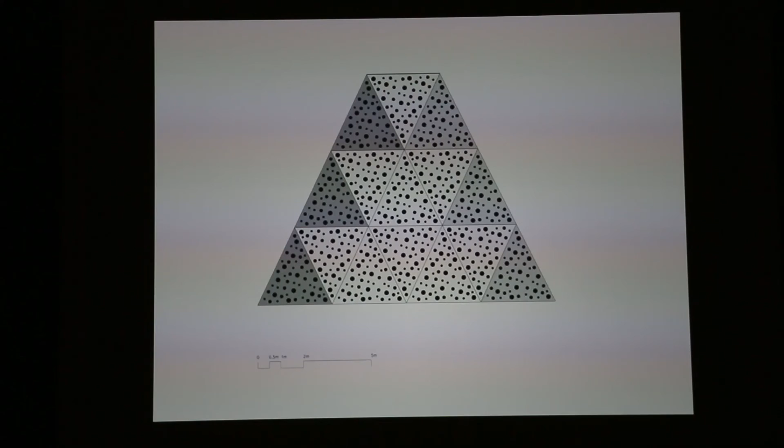to ensure a better integration of the holes. We thought about the origins of trials and found that in ancient times, in classical Greece or medieval Europe, trials were handled under a tree, often an oak or a lime.

We did some handmade plasticine models and tried to create some vegetal and organic patterns.

The main problem was constituted also in this case by the research of the right module, which could permit us to cast a repeated relief in a form and to repeat the same module to form a unitary design for the concrete domes.

Soon we got clear that a geometric parametrization of these organic forms and the definition of a triangular module was necessary to the realization of the domes with identical elements repeated in series to form a unitary structure.

To solve the problem, we charged Gramazio and Kohler from ETH Zurich to develop, based on our plasticine models, a digital model defining the correct parametric relief.

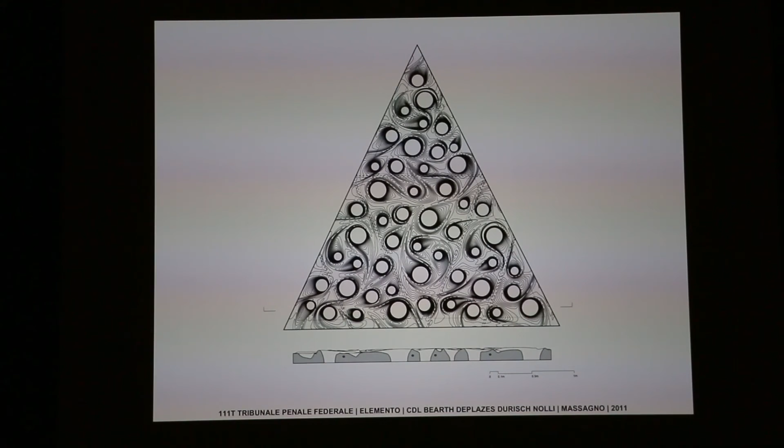The domes were divided into identical triangular modules to integrate the holes and constitute a unitary and continuous ornamental design, almost like a 3D arabesque.

From this parametric digital relief, the matrix for the production of the precast elements of the domes was done with a digital 3D cutter.

The new spaces are constituted by apparent concrete as one unitary material that emphasizes the substantial equivalence of structure and space. In this sense, the dome is a structural acoustic ceiling.

The walls are done in white concrete, and even the floors are cast in place in white terrazzo with Carrara marble aggregates.

The acoustic in the court, thanks to the perforated concrete dome, is excellent.

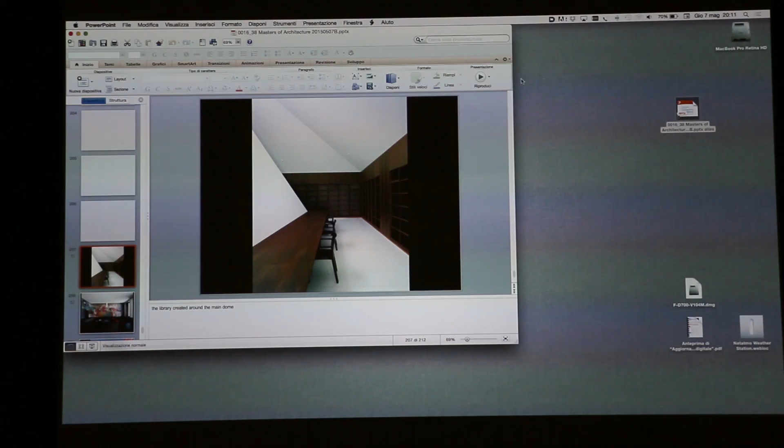Okay, we were at the library - now it's back, the image is back. Okay, the library, still without books. Now it's a much more pleasant space with all the books, created around the main dome of the tribunal.

To design and build is teamwork. To obtain a good result, it is necessary to have a good client, a good team of passionate assistants who are aware of their role and responsibility, to seek synergies with other professionals - engineers, technicians, consultants, and in the case of the Federal Court, even other architects. And of course, it is necessary to have motivated contractors, suppliers, and well-trained craftsmen and workers.